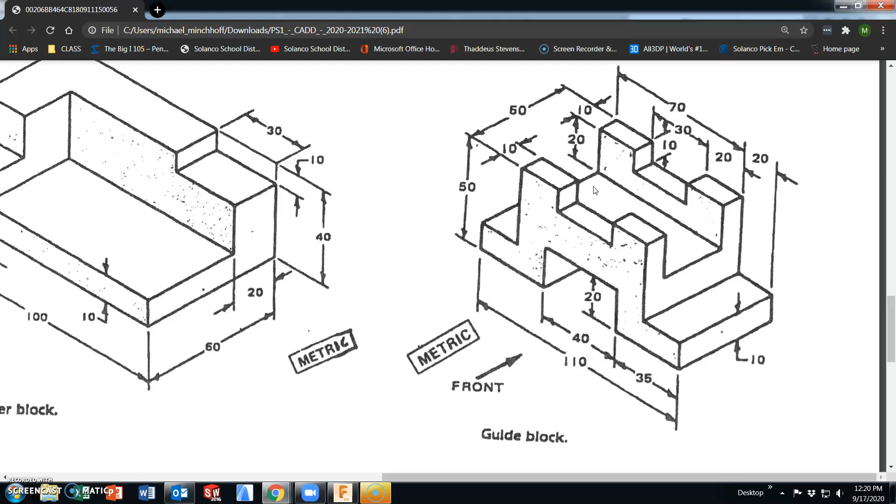So if I create lines or a rectangle, I'm going to cut all this overall length in half, this 40, this interior dimension in half, this 30 in half. All my vertical dimensions are going to stay the same until they hit that axis of symmetry. So this, in theory, should increase your productivity by 50% or 2 times. So let's take a look at this one.

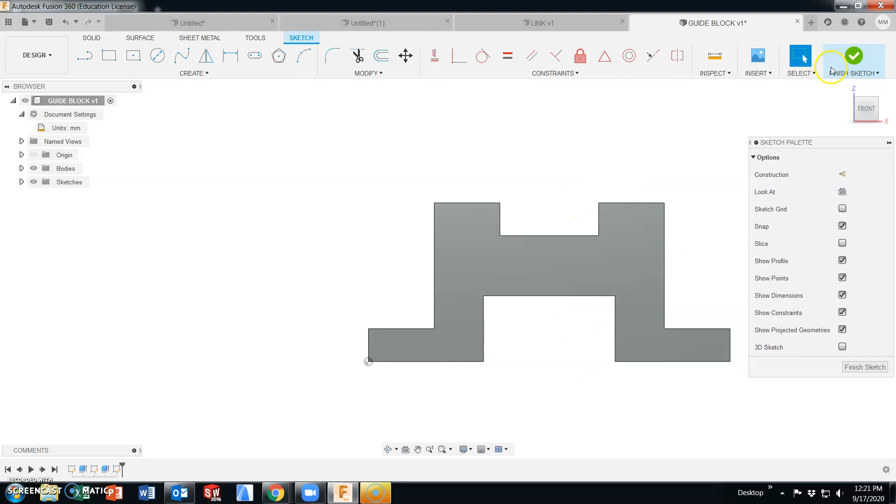If I were to sketch a line on here, here's my midpoint. I'm able to break this part in half. Both sides are equal. This allows the use of the mirror tool. So how do you use it? This part is in millimeters. So make sure that you are changing your units to millimeters.

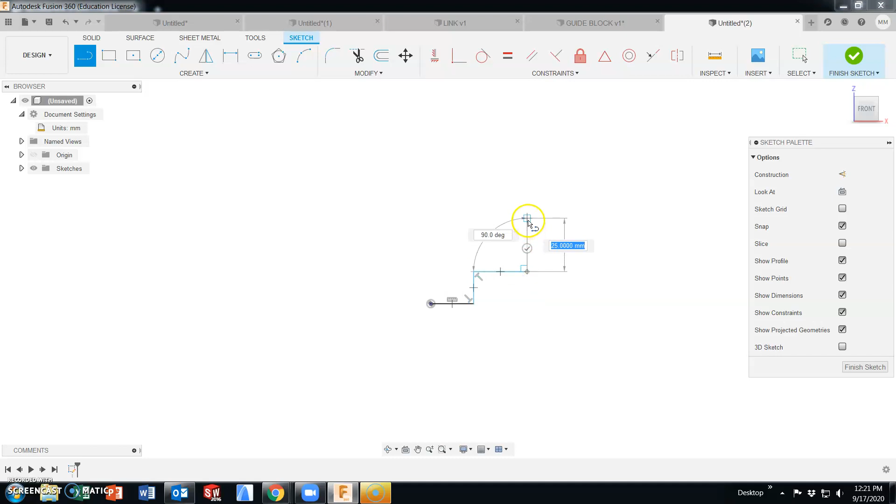As I sketch on the front plane, I am keeping in mind that my dimensions horizontally at the axis of symmetry are cut in half, or divide by 2. So instead of creating an overall length that's 110, I'm only going to create a length for this section that is 55. This will remain 35. This does not hit the axis of symmetry.

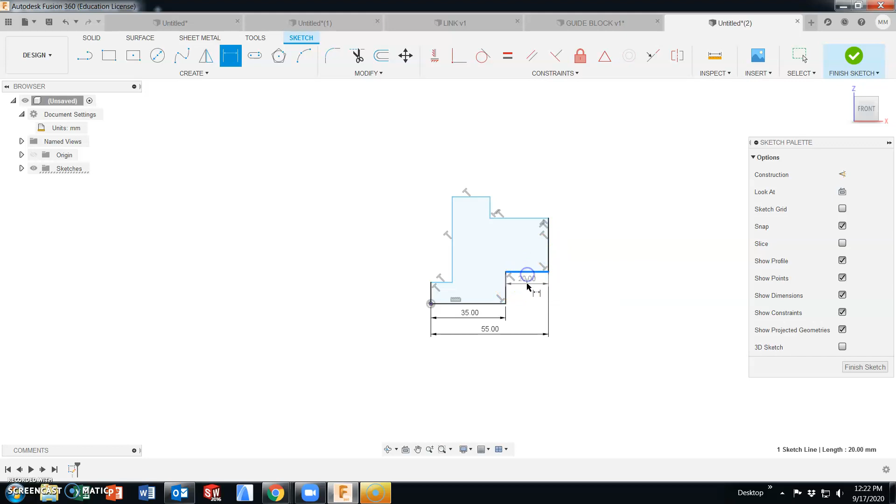This one does. Half of 40 is 20. And a vertical height of 20. Working the other way around, this is 20. This line at the top is 20. And then we have a depth down of 10. That will make this 15, and it should be driven at this point.

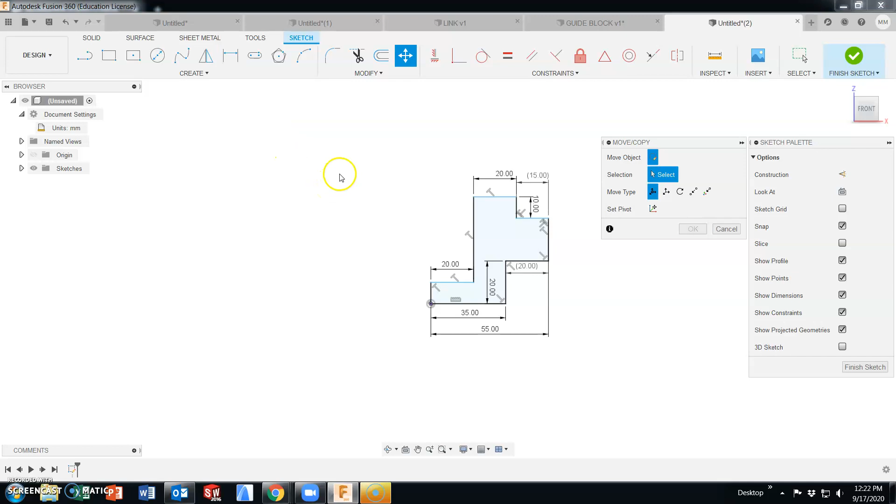So I want to take all of this sketched information and mirror it to the other side. So in your toolbar, you have the option to mirror. I need to select each individual line. So as I go through, I could select each individual line. The problem is if you miss one, you have missed it.

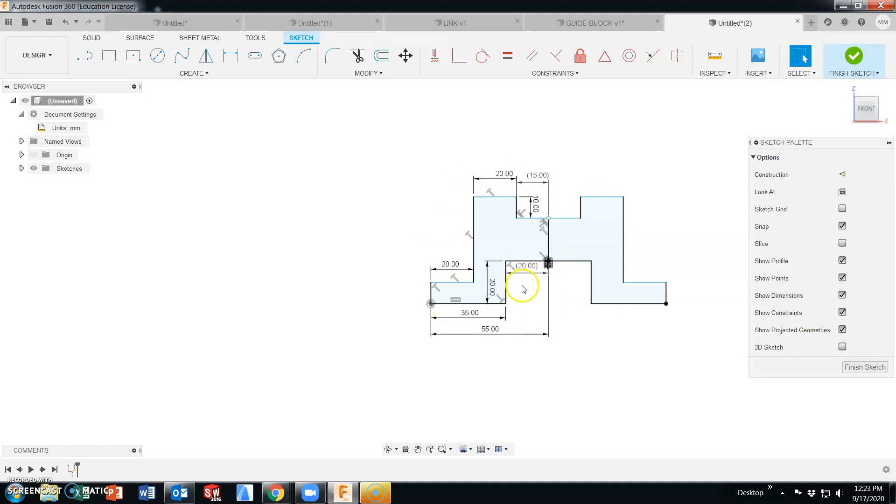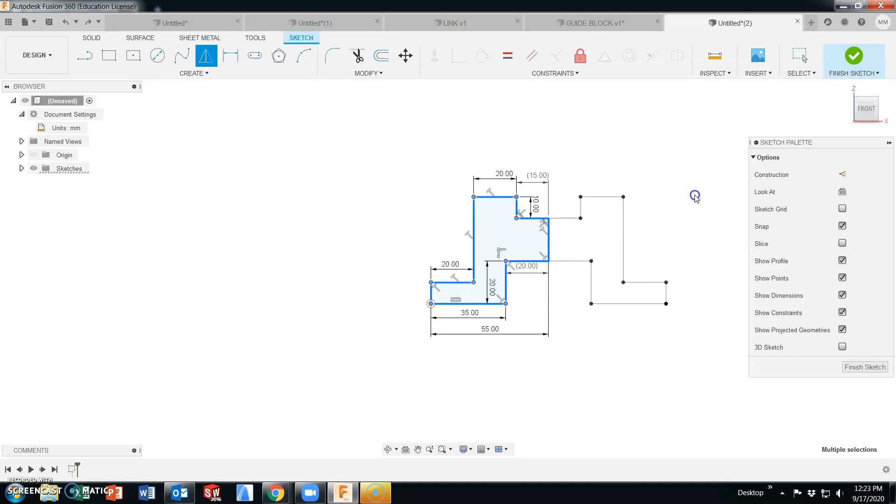And I can select the line to mirror about, which is this one, and it will create the opposing side. No dimensions needed here. It took all your measured lines and replicated them on the other side. Another option is to select all of the lines with a selection box at one time. That way you don't miss one. And now mirror on the axis of symmetry, and I have created the profile.

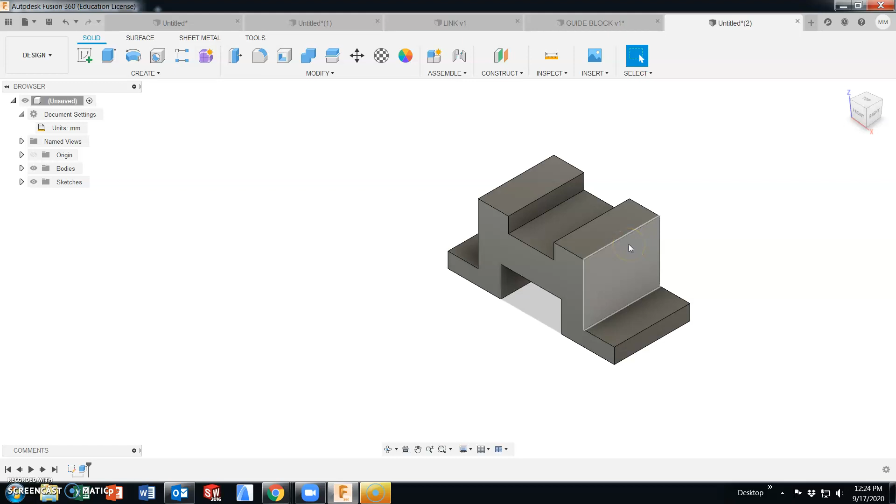From here it is a matter of press pull to set my overall width at 50. Center rectangle would be a good option. You should only need to use it one time. And that would take place on this face.

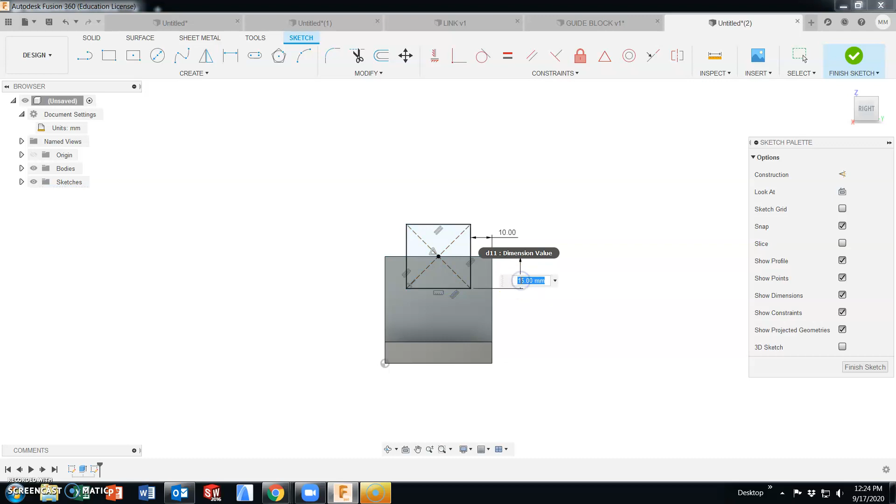By using center rectangle, I am alleviating the need for a dimension that this distance from the vertical line to the edge is 10. I do need to create a depth measurement, which is 20. And we are ready to remove this piece of material. And there you have it, using the mirror tool.